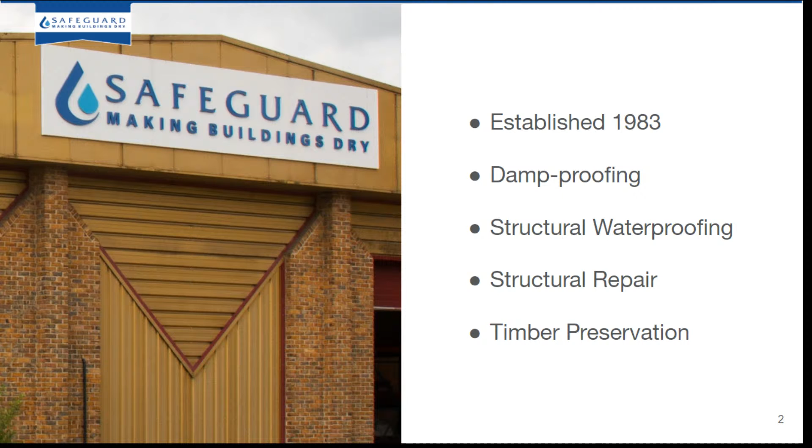A quick bit about us as a company. Safeguard has a long established history of manufacturing damp proofing and timber preservation materials. We're also suppliers and distributors of structural waterproofing materials. We have a dedicated team of materials scientists or material chemists to help us ensure quality control is maintained, as well as the development of new products within our range.

In the rather enormous world of remedial treatments, we like to consider ourselves market leaders. In that work we have had a lot of research collaborations over the years, which have also provided us with third-party test data, helping us attain certifications such as British Board of Agrément certificates, or BBA certificates, in the UK and overseas equivalents where we distribute to over 18 different countries.

Safeguard's product range spans many aspects of dampness in buildings, including materials for structural waterproofing solutions as well.

So today's seminar, really what we'll be looking at is the main guidance documents which relate to structural waterproofing, to ensure that your basement is both effective and compliant to regulations, as well as the evolution of basement waterproofing systems over the years, learning from mistakes, and how we've perfected the system year on year.

We'll be looking at advice on waterproofing design solutions, and of course, of great importance to specifiers, managing design liability, which involves working with specialist waterproofing designers and contractors alike.

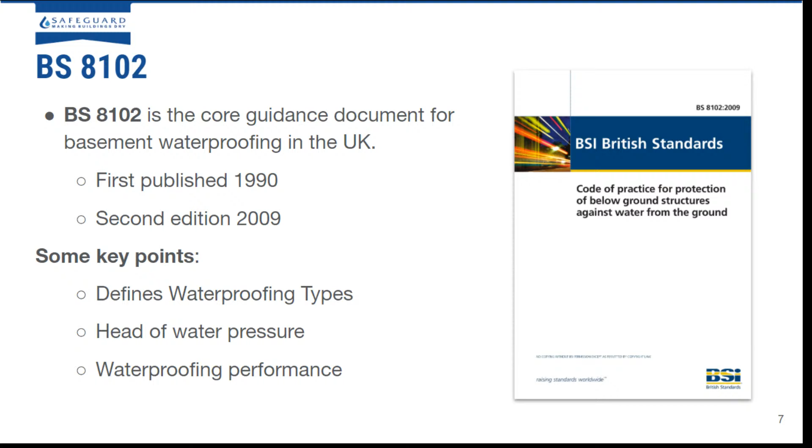So what is expected from basement waterproofing? Very simply, most people will want a dry basement, but how dry is dry, and how dry do basements literally need to be? For most of the time, the starting point for these discussions is: what is the area to be used for?

For example, if we look at this table here from BS 8102, we can say a basement car park situation would be environmental grade 1 in table 2 here. It describes some seepage and damp areas as tolerable depending on intended use, and local drainage may be necessary to deal with seepage.

So a certain amount of dampness would be expected. However, what we are probably most of the time looking forward towards designing would be a kind of a grade 3 environment. So that's where we go from grade 1, where some moisture is acceptable in terms of leakage. Grade 2, for example, plant rooms, workshops, where a drier environment than grade 1 is required. However, it's not habitable space.

That's where water penetration is not acceptable, but there may be some kind of dampness, some environmental humidity, which might need to be controlled as well, which is where we get to grade 3, where this is sort of the residential, habitable spaces, anywhere where you're going to be spending more time in there, either work or habitation. And this is where no water penetration is acceptable at all. And ventilation, dehumidification and air conditioning is necessary, appropriate to the intended use. And that is where the specification comes away from waterproofing into environmental control, appropriate to the intended use.

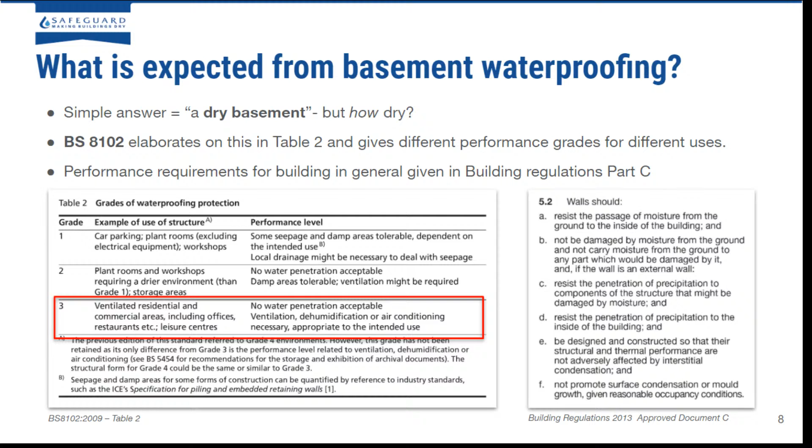So that really kind of gives us an idea about performance. In addition to that, on the right here we have a sample from Building Regs 2013 Part C, which refers to the impact of moisture on structure, its effect on ground slabs and retaining walls, etc., and how the building should be protected from the effects of moisture as well.

The UK approach to basement waterproofing seems to be very much about keeping as much water out of the basement as possible, and redirecting any water that manages to seep in towards a sump and pump.

So over the years, since the mid-90s, systems have changed quite considerably over that time, and a lot of mistakes have been learned, and it's very much more now a belt and braces approach, and does involve some advice learned off the back of a case called Outwing versus Randell, which back in '99 helped highlight the importance of having two systems as much as possible to prevent the impact of water entering a structure unwanted.

So in contrast, many other countries will have a much more robust approach in terms of the design of the building itself physically preventing all water from entering the structure, and usually avoiding the need for any kind of mechanical pump. But we are where we are in the UK with our market of both refurbishment and new build construction in differing materials. So we'll take a look at the evolution of waterproofing in a bit more detail later in the presentation.

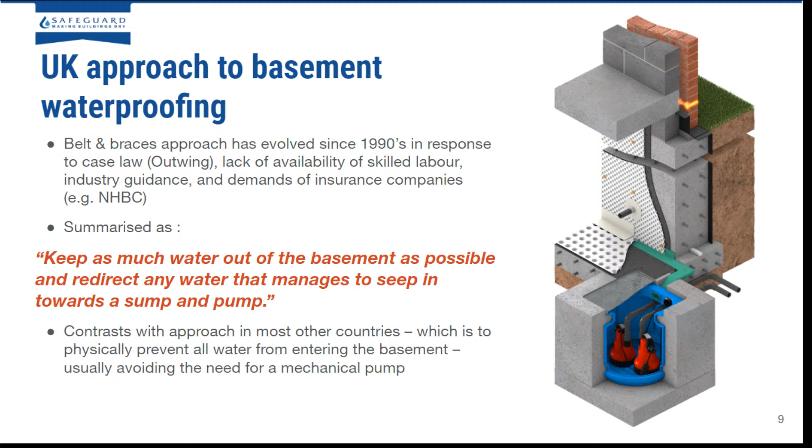So that's BS 8102 again, and it mentions the water head, so the height of the water likely to bear against the structure. Now this can be determined in a number of ways, in terms of costly site investigations, hydrogeological reports to establish where the water table may or may not be, how likely it is to be variable, whether it's a low or high risk situation.

Very often this kind of advice can be superseded, as it is in NHBC chapter 5.4, which we'll look at in a bit more detail later on as well, which is to generally assume the full height of water during the design life of the building, which is to say generally err on the side of caution and just design into a worst case scenario.

So rather than trying to mitigate how high you might take the level of your waterproofing on a structure, making sure that you design your waterproofing of the substructure and link it to the superstructure damp proofing course. Then that way you're fully enveloping the structure and protecting it against any kind of water from the ground.

Okay, so a little bit about waterproofing types as defined in BS 8102, which there are kind of three types, A, B and C. A being barrier protection, which can be applied to the inside, the negative pressure side if you like, or the outside, which is the positive pressure side of the structure, or even sandwiched in between.

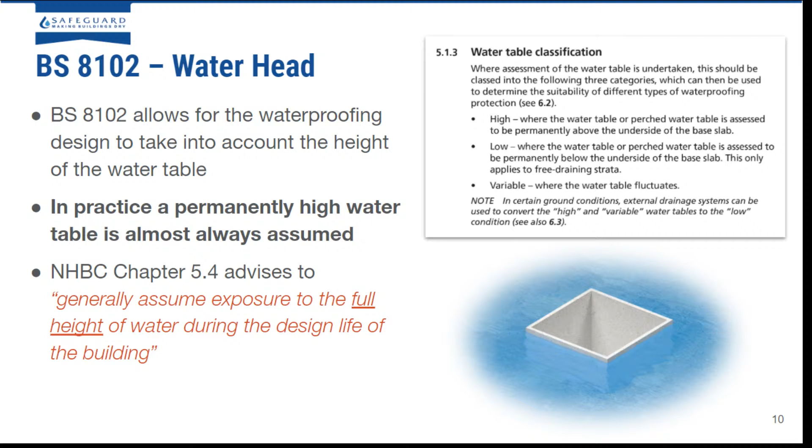Sorry, I've got ahead of myself slightly there. So that's kind of the type A barrier protection. Type B is your structural waterproofing systems, which is basically structural integral protection. So this is waterproof concrete designed to be waterproof, so actually the structure itself is doing the work.

With type C systems, these are what we call cavity drain systems generically, and this is much more about water management, where you're accepting that a certain amount of water will enter the structure, but you're managing when it does come in and redirecting it towards a sump chamber and a pump where it can be redirected further out to groundwater drain systems. So those are the three main types of systems that we have there.

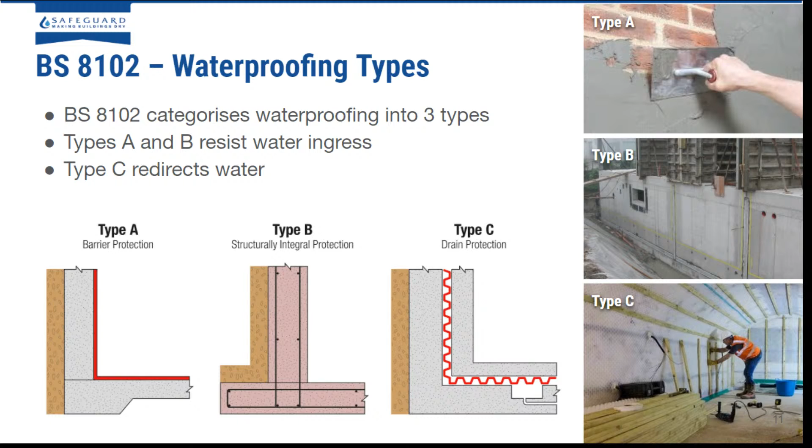So with type A systems, what we have again is a barrier protection system, and where there is a new build property, for example a new build construction, there is an opportunity to put it on the outside of the structure in a positive pressure system. Internally, as it may often be used in refurbishment of basements, or situations where the structure is built, for example with piled walls, you may need to waterproof on the inside. Then obviously these type of systems can be used.

And in the middle here is what's called a sandwich waterproofing system. It should be noted that this system in the middle is probably to be advised against. It doesn't lend itself for much in the way of repairs to that system, unless of course you add in an additional layer of a secondary system.

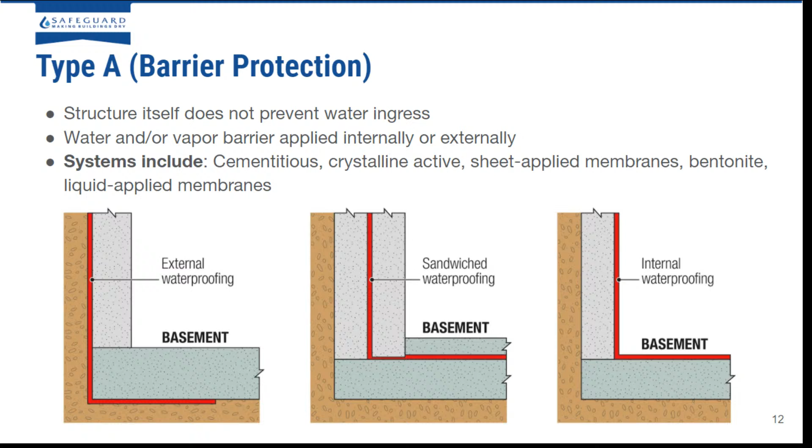So really anything which you can put on the positive pressure side, the benefit being that you can benefit from the pressure of the water pushing against the structure and keeping the system in place. On the internal waterproofing side, on the right hand side here, then obviously that may be a case where you have to install it out of necessity, but it can be mitigated with a secondary system as well.

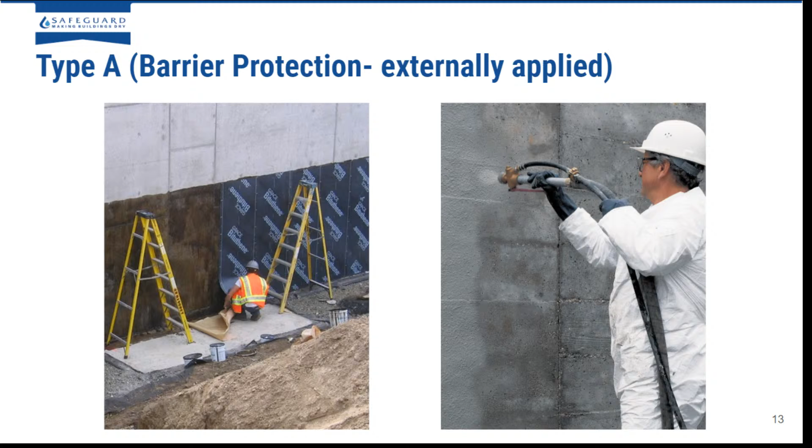Okay, so a few examples of type A barrier systems. Cementitious slurries can be sprayed or brushed or even trowelled occasionally. Bonded sheet membranes. We have liquid apply systems which can be sprayed as well, PU systems and such, polyurea. We also have the crystalline active slurries which can be sprayed onto concrete as well.

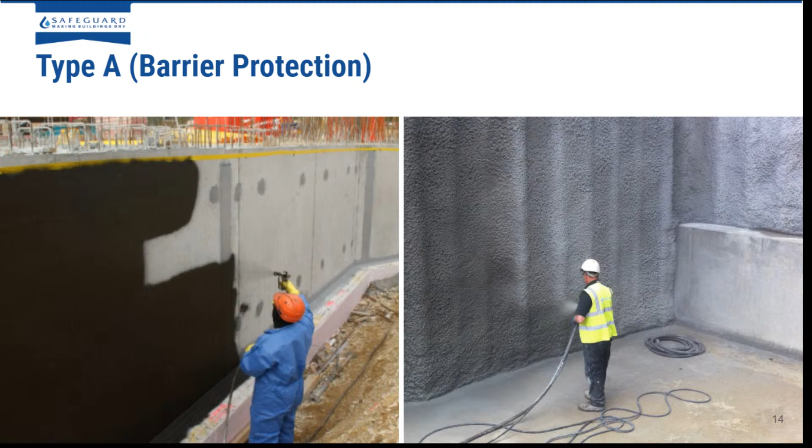Crystalline active slurries are slightly different from the standard cementitious slurry which you might see as a traditional tanking, and they work in a slightly different way.

So just to run through this chart here, where we obviously have the structure formed from new concrete, crystalline actives can be applied internally or externally. The new concrete will contain a certain amount of free lime within the structure, and what happens is that these crystalline active slurries will react with the free lime within that structure and actually cause the growth of crystalline complexes which grow back into the capillary pores indicated in red.

Just if I put the pointer on here, just over here - so this is where the crystalline complexes are growing back into the structure, and they will help to prohibit the moisture from penetrating through the structure any further.

Often combined with type C systems, the cavity drainage systems, as they also offer some protection against free lime by restricting the growth of free lime by actually inverting it back into the concrete. So a very good system to use.

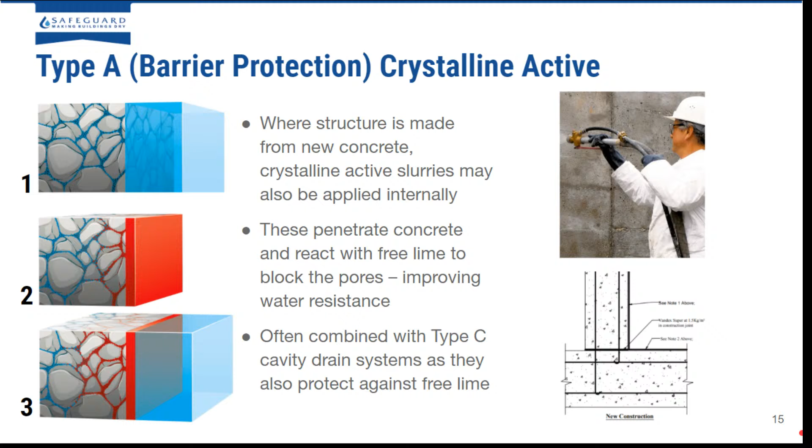Often benefits of this include things like coverage rates, because it is not applied as a thickness of layer - it is literally like a cementitious paint almost when it's applied. It can also be dry sprinkled onto wet concrete or damp concrete, green concrete, and be used, for example, on the top of a slab before the concrete wall is sat down and cast on top of it, and that will help to provide a construction joint protection layer between the two elements, the slab and the poured concrete wall. So quite a diverse product.

Where we are applying type A systems internally as a protection layer, we do need to be mindful of some conditions that must be met. And when you do apply these systems to the internal face of the basement wall, known as the negative side, there are additional demands placed on these type of systems. Any groundwater pressure can effectively push through and delaminate that tanking layer from the wall.

If you consider, for example, old Victorian brickwork as a good example, obviously there can be conditions there where we have weak mortar, weak bricks. Water pressure that is strong enough can easily push through that element of the structure and create a water pressure behind the applied layer. So these systems must be capable of being applied to a damp substrate, which sounds pretty obvious. Most cementitious systems will easily do that.

Must be able to withstand water pressure on the negative side, so that is slightly a gamble in refurbishment situations, less so in more designed and constructed basements. Water pressure must be resisted by the bond between the tanking system itself and the substrate, which needs to be suitably prepared so it can accept the tanking system without loose material or friable surfaces being pushed off by acting water pressure against the structure.

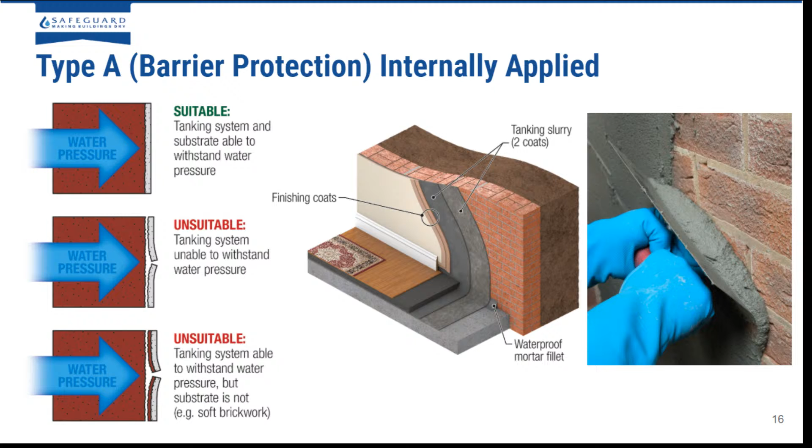If you have any doubt about the suitability of a product, ask the manufacturer for evidence of its effectiveness, or advice on another way around the design. If you go for any type A system on the internal, negative pressure side, correct surface preparation is essential, and the application must be carried out meticulously to ensure a good strong bond against any water pressure coming to bear.

With type B systems, structural integral protection, effectively the structure is the waterproofing system. This can be a combination of waterproof concrete designed to be waterproof, or waterproof additives included. Construction joints should be considered as potential weak spots for water to come in - even if the structure itself was formed from stainless steel, those construction joints are where the problems will occur.

Concrete should be designed to BS-EN 1992 Part 3. It will be waterproof, not vapour-proof, so an external or internal vapour-proof membrane may be required. There would also be some consideration around the cost of additional steel reinforcement to form a structure able to withstand pressure, and with those day joints and construction joints, it is worth considering further.

For example, in the most basic design, we might form a raft slab and build a wall straight off of it. It might be worth considering putting in an additional kicker, as shown at the top of this image, which takes the level of the construction joint slightly higher above the point at which water is likely to collect on the extended toe of that slab and creep through. This takes it to a slightly higher point, so it's less likely to build up and creep through that construction point, particularly when an additional water bar, water stop or hydrophilic strip has been applied in that structure as well. Dealing with those construction points is absolutely key, even with waterproof concrete systems.

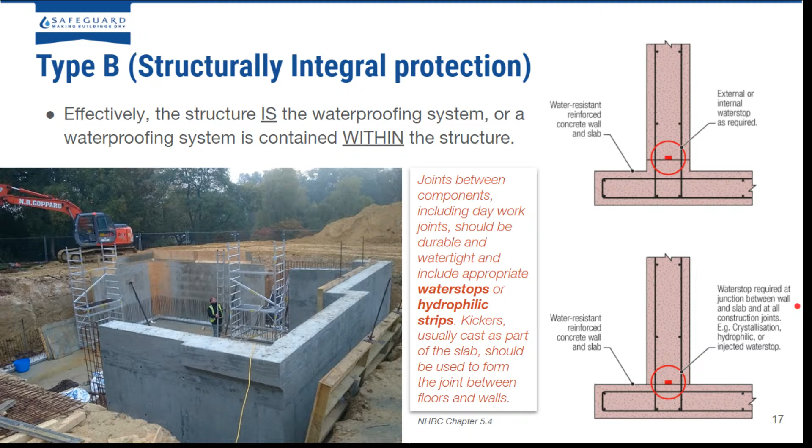When it comes to waterproof concrete, there are two main forms really. There's waterproof concrete with admixtures, where there's an expectation that crack width should be limited to 0.3 for flexural cracks and 0.2 for cracks that pass through the section. There are companies out there that will monitor the mix, the additives going in, the supervision of the mix and the pour of the concrete on site, and sign off on those applications as part of a guarantee system.

We are looking to apply concrete which is designed without admixtures, relying on the strength of the concrete itself. Then there are other expectations - you should expect some post-construction crack inspection, and it may be that you need to resin inject afterwards to deal with any shrinkage or thermal cracking that might have happened. There may be some post-installation work that needs to be carried out, and a minimum section thickness of 250 mil should be used in this kind of design. Again, refer to BS-EN 1992 Part 3, Code of Practice for Design of Structures for Retaining Aqueous Liquids, for further advice on that.

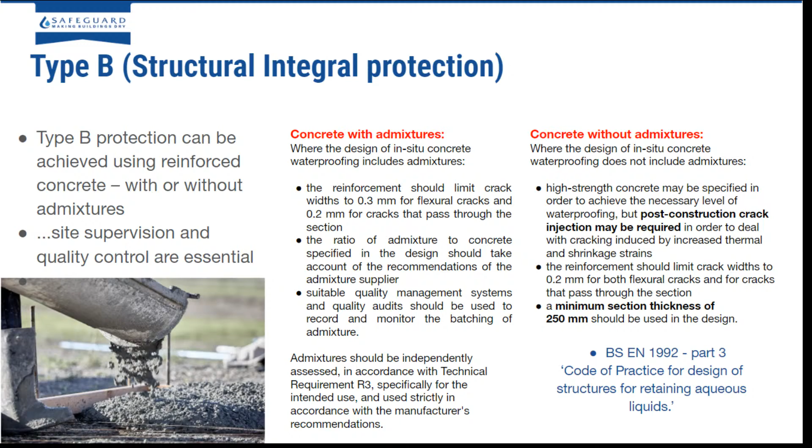Okay, cavity drainage systems, drainage protection, Type C, however you want to call it - egg box, bubble wrap, all sorts of nicknames this stuff has.

Often applied internally. Geotextile based or backed versions can be used externally as well to offer additional drainage layers on the outside of a structure.

Cuspated or dimpled plastic membranes are now a very familiar concept in the UK, particularly in basement refurbishment projects. They are preferred by specialist contractors mainly because they eliminate issues with bonding, delamination, and adhesing. They're much easier for surface preparation, much simpler to apply, with less disruptive prep work.

They are an alternative to type A and type B systems, whereby they actually control any water which it's anticipated will come in, and they then control the flow of water to a point at which it is directed into a sunken sump chamber with a pump, which will then take it out to surface water discharge.

So there is some requirement for the structure itself to have some primary resistance as well. It's worth inspecting the substrate to make sure there's no free water literally running in. Once some localized repairs have been applied, you can then apply these membranes and create a fully draining system much easier without too much risk.

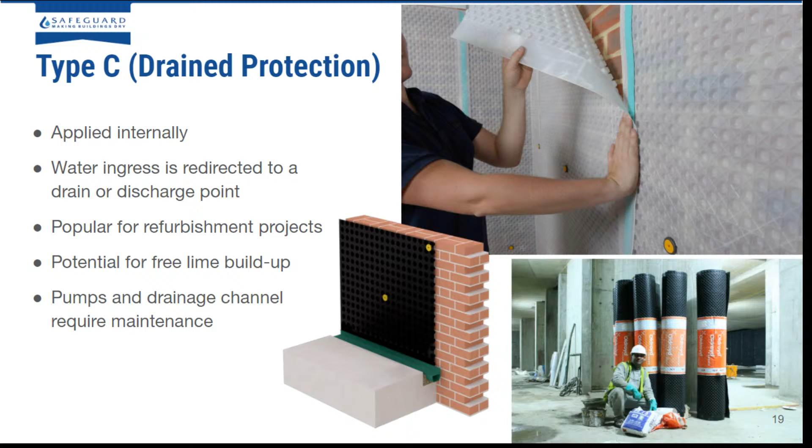So to reiterate, as stated in BS8102 and also further mentioned in the Basement Information Centre Design Guide: the external basement wall must provide enough resistance to water ingress to ensure the cavity accepts only a controlled amount of water or dampness. That's probably the short version of it.

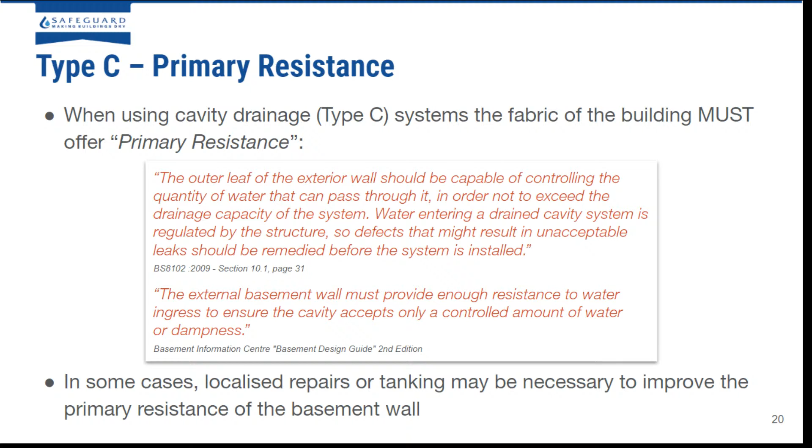So some localised repairs may be needed to allow the system to manage the amount of water coming in, rather than just constantly running where free water is running into the structure.

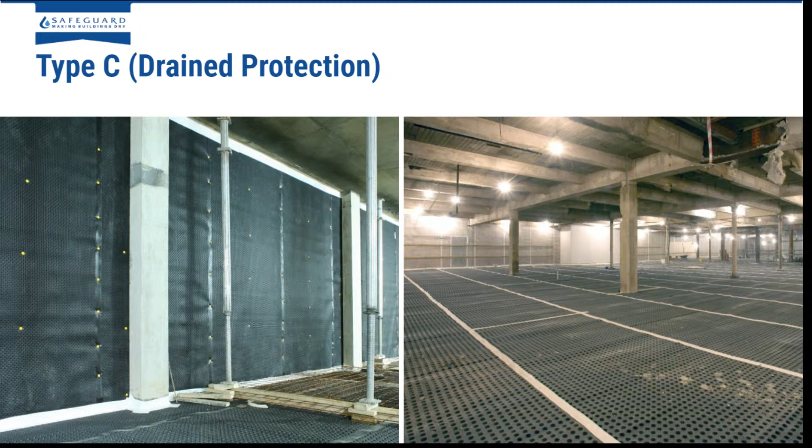And again, Chelsea Academy, similar construction. This is obviously a new build structure, as you can see by the condition of the concrete here. This is installed as a secondary system, obviously in a high prestigious place - it's also a sports hall. No option there for any risk of water to come in, and if it did, it could be easily managed by having a cavity drain system installed.

Cavity drain systems are enabled, should we say, by the inclusion of perimeter drainage. This is a proprietary channel installed at the wall floor junction, preferably. There are different ways it can be set up, preferably in the recess of a slab, so the lowest point takes it to the next lowest point, i.e. the sump chamber, where it will be pumped out.

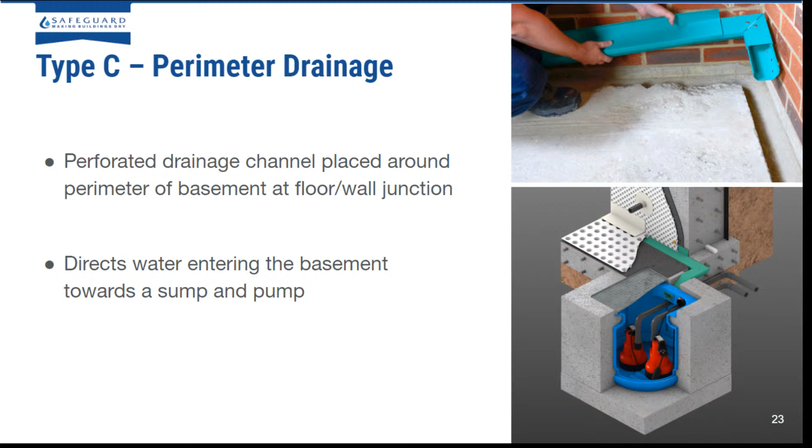These would be installed, and additionally you want to make sure there are access points installed around the perimeter of your structure, so that the channel can be flushed through, or rodded through if need be, so that any loose debris, free lime, silt, or rubbish can be flushed through into the sump chamber and removed. That way whatever's happening on top of that slab, the channel is being fully maintained, and water which does get under that system will always be able to move freely.

NHBC chapter 5.4 has the following requirements for pump systems: there should be a primary pump system, mains operated, a secondary pump system which can be operated by battery or generator backup, an audio visual alarm that indicates failure should that happen, and the pump should operate automatically.

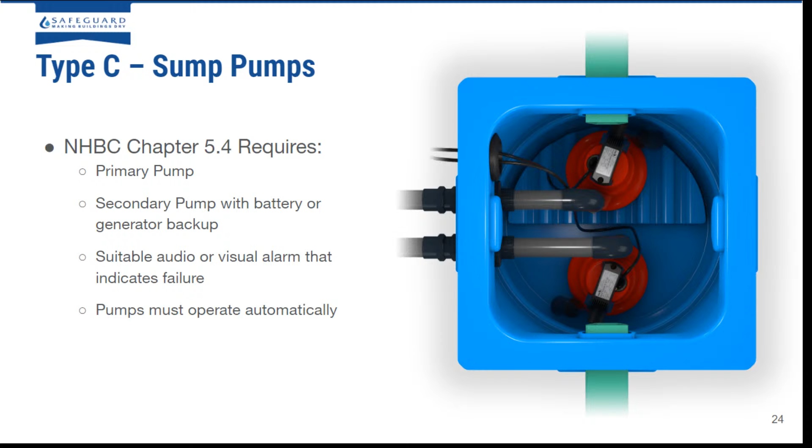Most of these pump systems you see in the market will have a float arm, which will kick into action once the level of the arm has reached a certain point. It will activate the pump and pop it into action. Additionally, once those pumps have been overwhelmed, should that happen, there are secondary miniature float switches which will then activate alarms to indicate that there is a failure in the system.

In simple terms, there are telemetric systems which will contact you by mobile, all sorts of systems out there as well. Our friends at the PCA, the Property Care Association, have a best practice guidance document for groundwater pumping stations for Type C systems, because very often we get asked how many pumps do we need, what size chamber, etc.

The best practice guide as a kind of coverall, if you put a gun to somebody's head, they would probably say one sump per 50 linear meters of channel. That's one sump chamber, which would have 2 pumps in it - a mains operated and a battery backup system, linked up to an alarm as well. That would be a good sound solution, so 50 meters of perimeter per sump chamber as an approximate guide.

Obviously, what you can't account for is changes of conditions to structures in and around the basement that you're waterproofing, weather conditions, groundwater conditions. All sorts of things can change over the years and the life of the structure, so it's best to opt for that worst case scenario and put in a system that's going to deal with as much as you can expect.

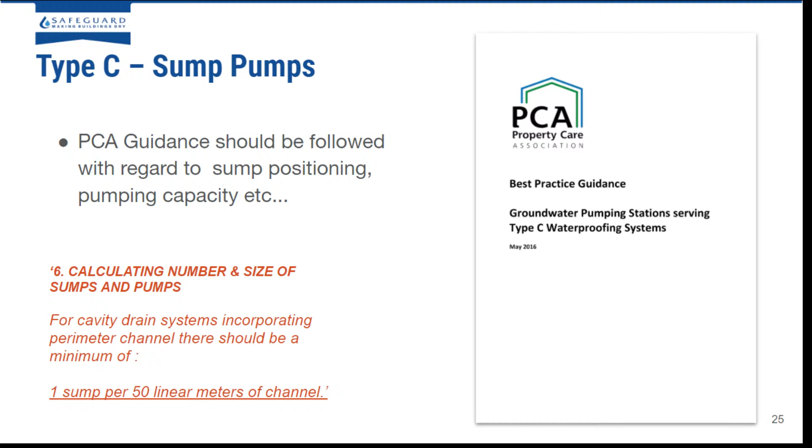One thing to watch out for, we mentioned free lime previously, is the build-up of free lime, and this is why it's important to operate maintenance schedules for pump systems, and to also install access points within the perimeter channel to make sure they can be properly maintained.

The risk of free lime, as you can see in these photos, can be quite damaging, and once that pump's failed, the water that's collecting there is not going anywhere. Before you know it, you're ankle deep in water.

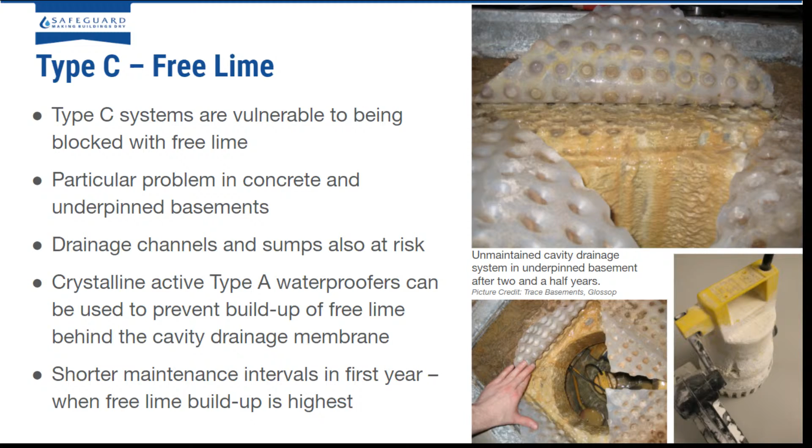There are ways of managing the onset of free lime in terms of lime inhibitors on concrete prior to application, but also acids, for example, which will break down lime if used carefully, once it has become present. Normally you would expect to have a pump maintenance schedule for your basement waterproofing system to manage the effects of free lime.

This is how it sometimes looks more innocuously here - he says, looking at a photo of a rather damaged pump at the bottom right there.

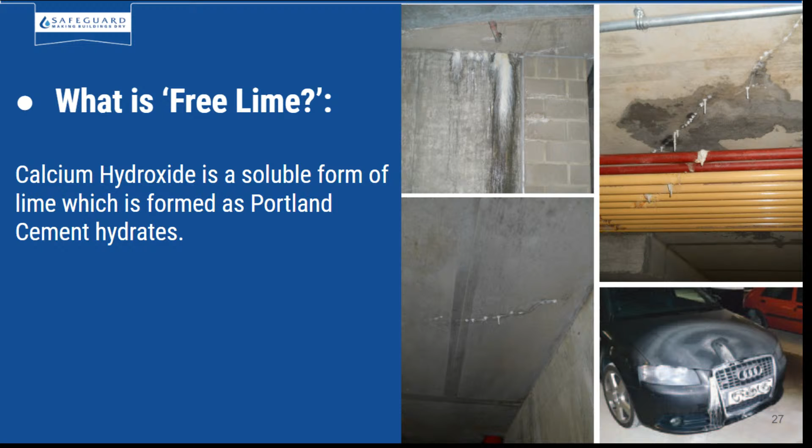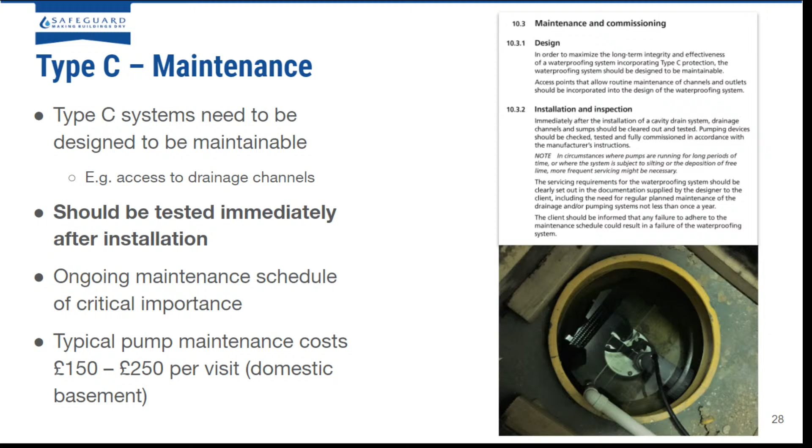So really what we're looking at when you install these Type C systems is that as part of any design system, you should include a pump maintenance program, which may be every 3, 6, and then annual inspections after the first year, where most of the free lime would have washed through by then. Most specialist contractors that install these systems would suggest that if you do not comply by having a pump maintenance schedule and annual inspections, you would forfeit the terms of your guarantee as well.

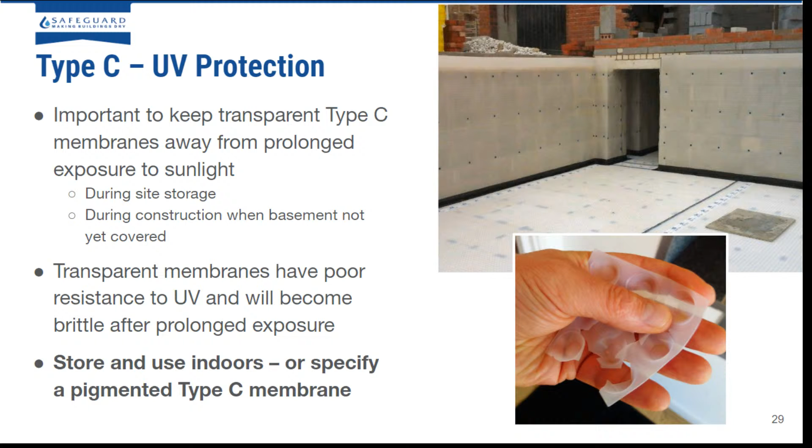A very quick side note on the importance of UV protection. It has been noted over the years, as part of the ongoing evolution of these systems, that clear, non-pigmented membranes tend to have a poor reaction to prolonged exposure to sunlight. UV light can tend to make them brittle. It's something to be aware of, but not to panic about - certainly worth considering where materials might be stored on site for a long time. If that happens, just make sure they're covered up so they don't succumb to this phenomenon.

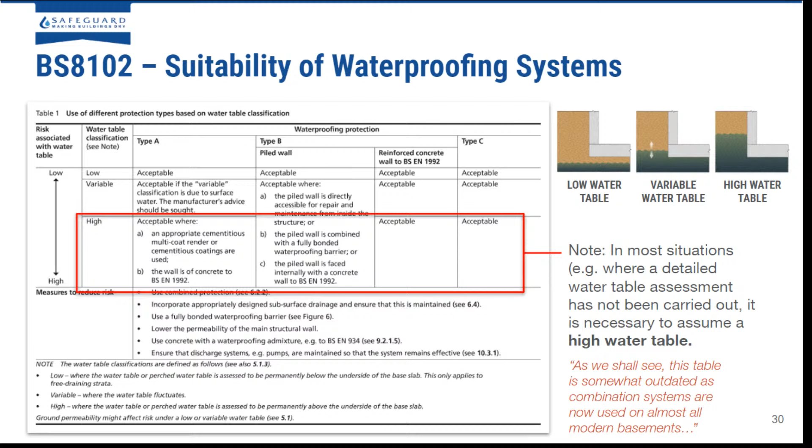When it comes to suitability of waterproofing systems and combinations of systems, we have this rather complicated chart available in BS 8102 in the current incarnation - hopefully this might change in the new one. What we see in red there is about measuring the risk of high to low water table, in terms of classifications. In red at the bottom, I think, bypasses all of this - this table is somewhat outdated as combination systems are now used in almost all modern basements. Particularly with what we call grade 3 systems, where this is habitable space, you would pretty much always use a combination system in basement waterproofing design.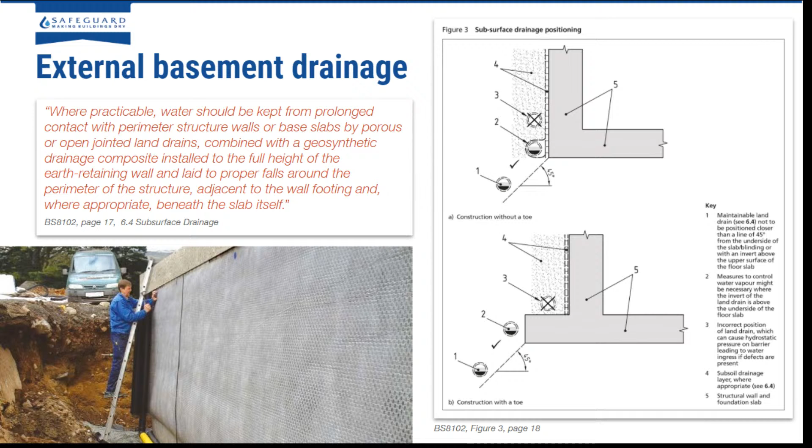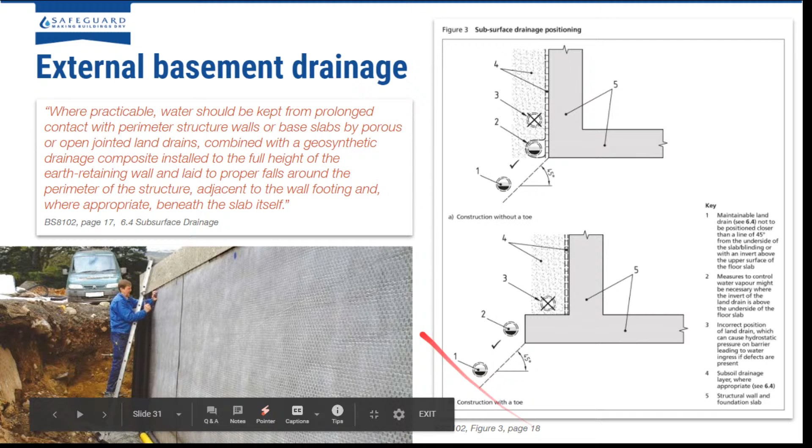As an indication, we quite often see this happen where the land drain is sat atop the toe here. Best advice would be to move it down at a 45-degree angle, away from in line or below the level of the slab. If it's sat here, it will collect water against this potential construction joint between the slab and the retaining wall, and that's where you're asking for water to collect and track through, or put it under more pressure than it should bear. So bringing it away from the wall in positions 1 or 2 is much more acceptable.

Construction joints and service entries. When we consider things like NHBC Chapter 5.4, we are looking at minimising and avoiding any kind of penetrations through the structure itself. So bear in mind when designing a structure, where services do need to come out, rather than taking it through a layer of waterproofing, try and design it up and over and out, so that we reduce the point at which services need to penetrate any waterproofing system, which will help reduce the risk of subsequent failure.

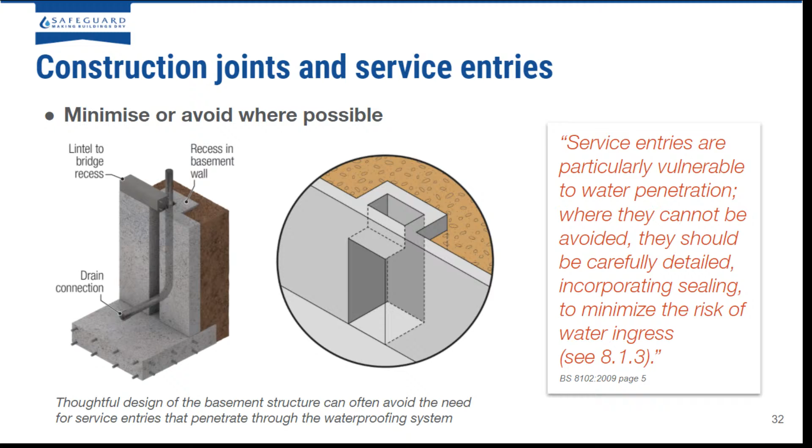However, sometimes you can't avoid it. Certain construction joints between wall and slab, for example, are unavoidable. There are a number of ways, from hydrophilic strips and water bars to elasticized adhesives and construction joint tapes, which are bedded in with polymer modified slurries, bedded in with construction joint tapes against those structure points, on the positive pressure side, to stop water from penetrating through.

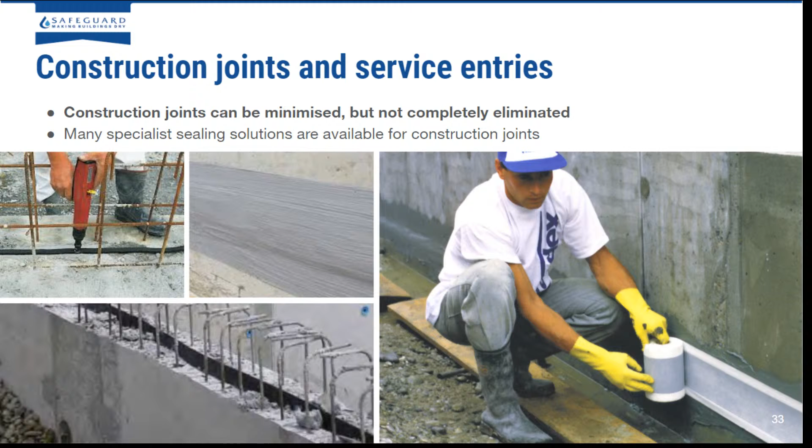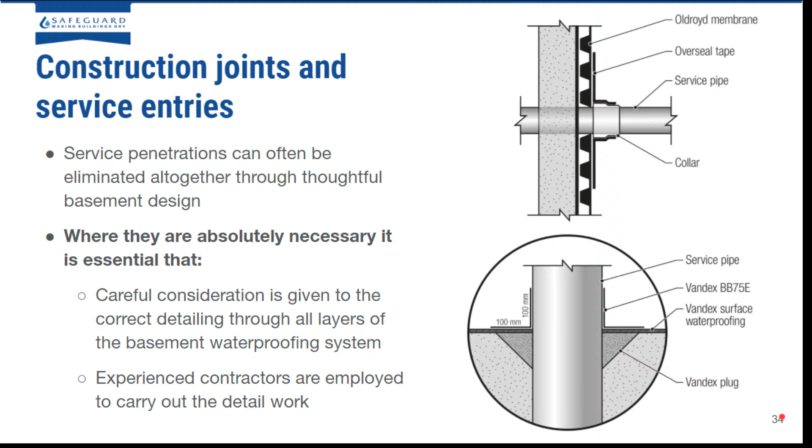However, occasionally you might run into a situation where you do have to go through. It could be a basement refurbishment, or an existing service which is immovable, and you have to detail around that. This is where, as much as we can show all sorts of details, it is important to be using experienced contractors who will use their wherewithal and the right products to deal with these kinds of situations.

We are also required to mention fire safety in basements, or at least nod to it and give you directions to go to. So approved documents B, volume 1 for dwellings and volume 2 for buildings other than dwellings. These documents lay out conditions regarding, for example, emergency escape windows, protected stairwells leading from the basement to a final exit. There's a lot of conditions on the types of fire doors required, and the consistency of access and egress in the area below ground in a fire situation.

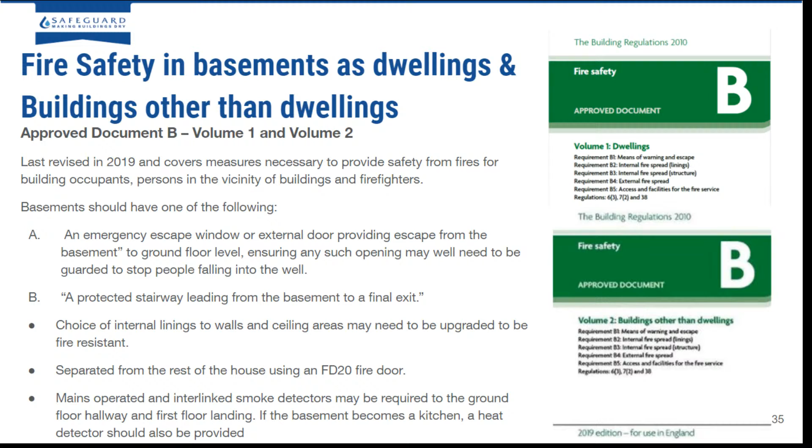Additionally, we are required to mention the effects of materials in fire situations. Back in January 2020, for example, we have this document, a review on the ban of use of combustible materials in and on the external walls of buildings, including attachments. This is obviously as a result of the Grenfell incident. Although it's not specific to basements, it gives us a nod toward considering any materials likely to be flammable in building makeup, which may give us a clue to how the future is going to go in terms of waterproofing. So we have to consider things like plastic membranes, polypropylene membranes, HDPE membranes.

When burned, they do release things such as hydrocarbons, carbon monoxide, carbon dioxide, and aldehydes, so there are effects when these materials burn. With cementitious materials and the right substrates, there's a clear benefit, as cementitious tanking might typically be rated as a Class A1 product in reaction to fire. So there's a clear benefit in fire resistance over cavity drainage systems, but it's about balancing current obligations against what they might be down the line.

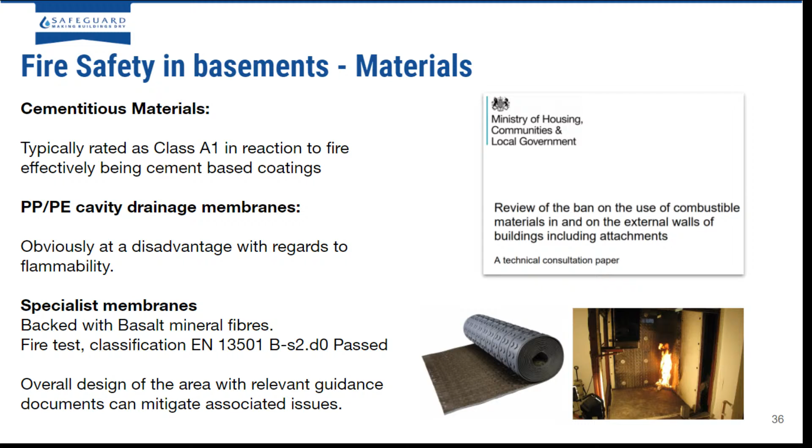There are specialist membranes on the market. Our supplier has specialist membranes with a basalt fibre backing, used in tunnels where it has great fire resistance. This can be cost prohibitive at the moment, but down the line we might see these fire resistant membranes becoming more of a norm. So it's just a nod to the future really.

Okay, so improvements in basements and waterproofing standards from the 90s to present day. Where do we see basements fail? We've seen lots of issues with construction joints, and cases where singly applied systems failed and allowed water in. This resulted in new case law which set a precedent for applying combination systems, usually a primary followed by a secondary drainage system.

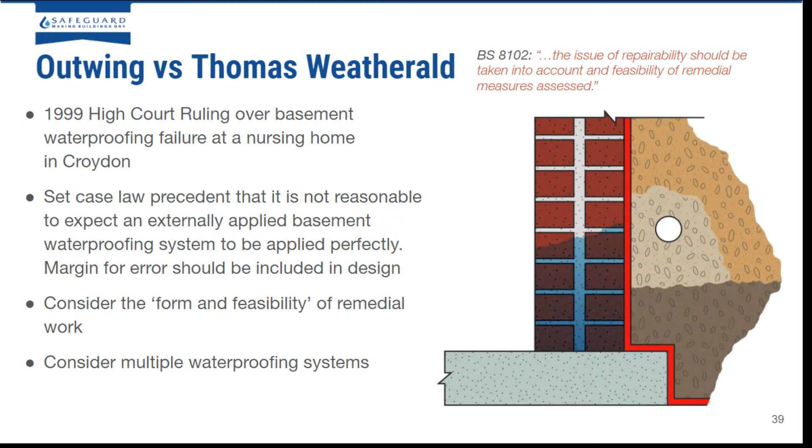The case went to court, and a ruling was found that it's not reasonable to expect an externally applied waterproofing system to be applied perfectly, and a margin for error should be included as part of the design. So the form and feasibility of remedial work should be considered, and multiple waterproofing systems, again depending on grade 1, 2 or 3, should be considered to provide a good waterproofing system which fulfills the terms of the contract, i.e. a waterproof basement.

With BS 8102, the lessons from Outwing were reflected in the 2009 edition. Where defects may occur, systems should be repairable, and combination systems should be considered if you want to further your offer of protection on a substrate.

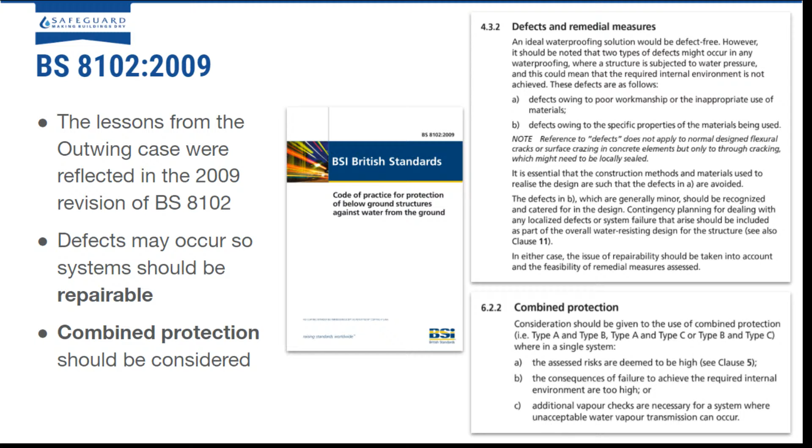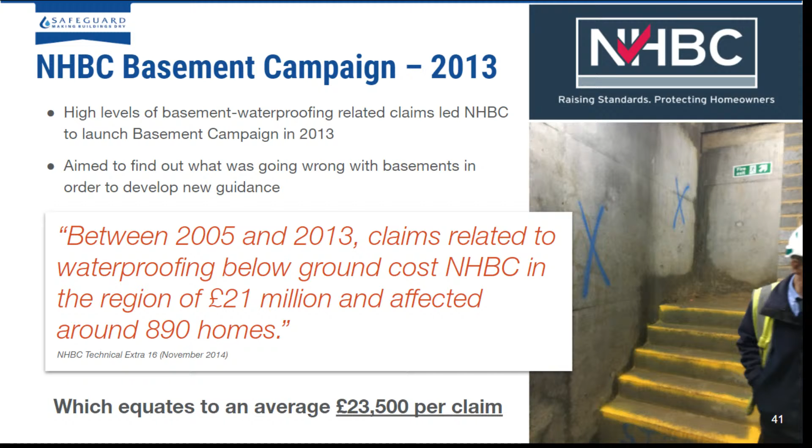NHBC, National House Building Council, started a campaign in 2013 after running a review between 2005 to 2013. Claims relating to waterproofing of below ground structures cost NHBC in the region of £21 million and affected 890 homes, about 23.5 grand per house over that period. This gave them cause to review the claims made and take a much more analytical approach to structural waterproofing in terms of future warranties and guarantees. They stipulated a few weak spots in design where things were going wrong, and wanted to alleviate those problems, reducing payouts but also ensuring inconvenience to homeowners wasn't an issue anymore.

Some of the issues were jointing defects at ground level, where substructure meets superstructure, not just at the wall floor junction, but at the top where the basement stops and the ground walls start to build up on top of it. Service penetrations and podium slabs accounted for about 12% of claims. A single system being used alone, either Type A or Type B waterproof concrete, without any secondary system in projects with a high or unknown water table. And often, as sad as it is, poor design and workmanship.

That was about it. It wasn't thought of properly and it wasn't installed very well. And I think that's where a lot of the issues occurred as well.

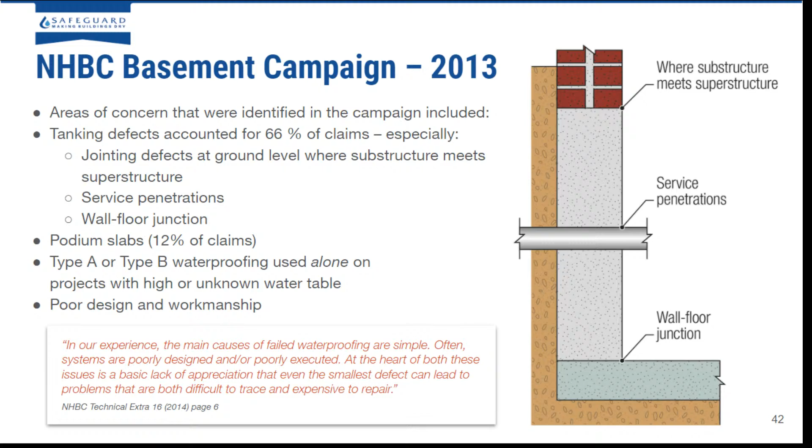So NHBC took the findings from the basement study and codified them into new guidance. Once these were released, it's built on top of the advice given in BS 8102. Again, not mandatory, but still very good advice. If you combine this with BS 8102 and look at the advice given in those two documents, then you're going to have a very successful design and basement construction.

And it has proven also to be a success, and as of 2019, NHBC had not had any basement waterproofing claims since the Chapter 5.4 was introduced back in 2015, so a worthy document indeed.

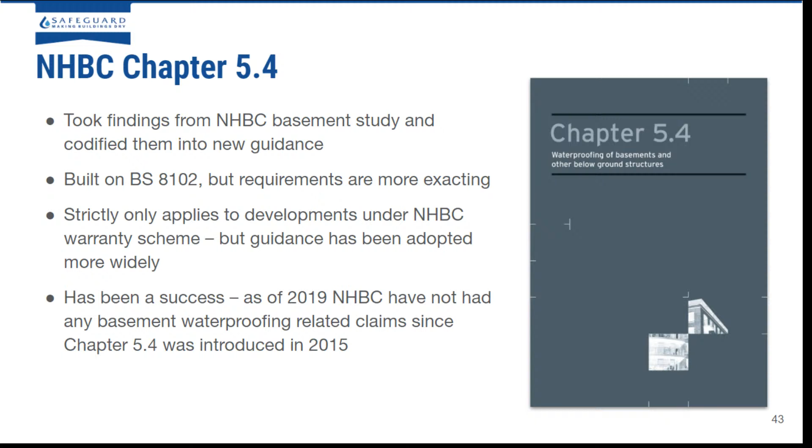Okay, so some of the things that the document lays out include a qualified CSSW system designer, certified surveyor for structural waterproofing, combined systems to make sure that you are accounting for any potential damage or failure in the original waterproof system. Assume a full height of the basement for waterhead.

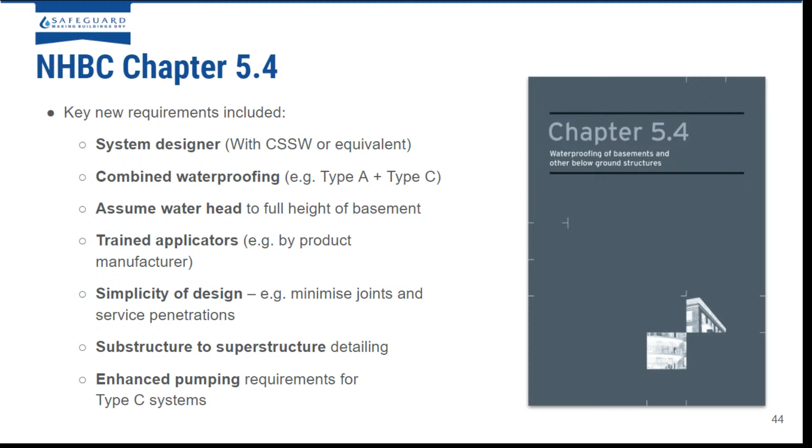Trained applicators - people who are installers trained to use this product correctly. Simplicity of design - make sure the structure itself doesn't offer too many complications that allow water in at early stages. Make sure the substructure and superstructure detailing is linked. Making sure you have an appropriate pumping system, a pumping station, for your Type C system as well.

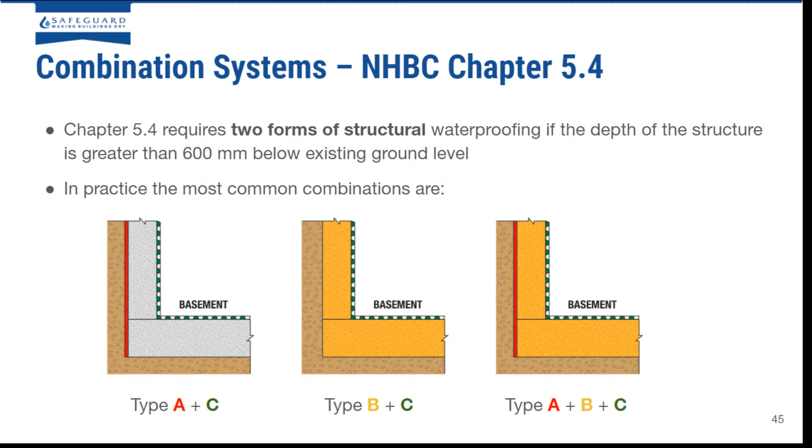So this is what we're looking at: Type A's, B's and C's. Effectively, barrier systems and waterproof concrete systems, but all supported by the inclusion of a cavity drainage system to collect any water which might come through construction joints and the such.

So modern basement systems - this is where we're going to, just a reminder of what we mentioned before, with the general premise being to keep as much water out of the basement as possible and redirect any water towards a sump and pump to remove the water.

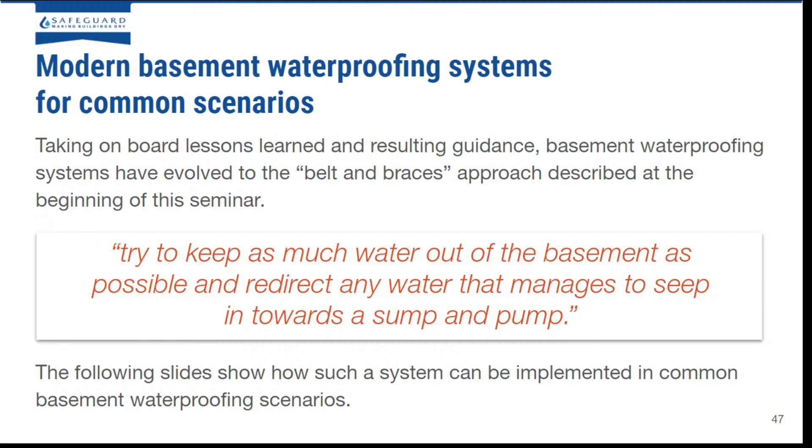And this is kind of what we're looking at. These are systems that we've come across, subject to basement types and common scenarios.

So new build reinforced concrete, where we have an opportunity to use things like crystalline active slurries between construction joints on the external face of the structure as well, possibly waterproof concrete indeed, a water bar between the construction joints to enhance the waterproofing, even a strip on the outside - a construction joint tape on the outside - to additionally enhance that, a drainage layer on the outside as well.

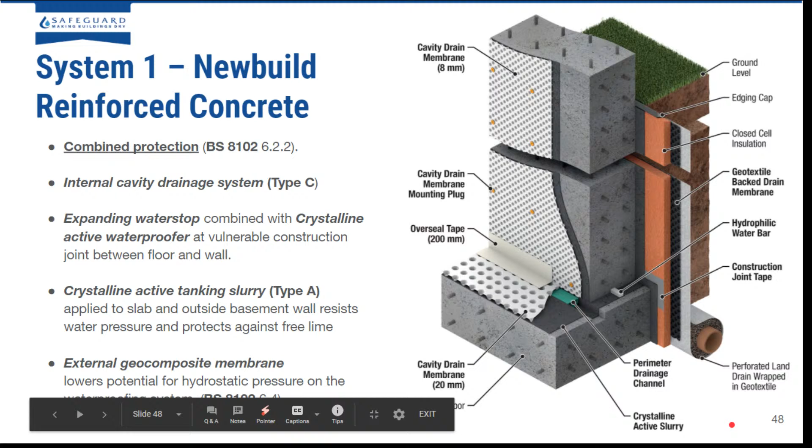And this is all bells and whistles, and even a drainage layer on the inside, which will collect any water which - God knows how it would get through that lot - but if it did, it would initially be collected and taken to a sump and pump system. So a complete and utter bells and whistles approach for high risk situations, but some of those parts might be interchangeable.

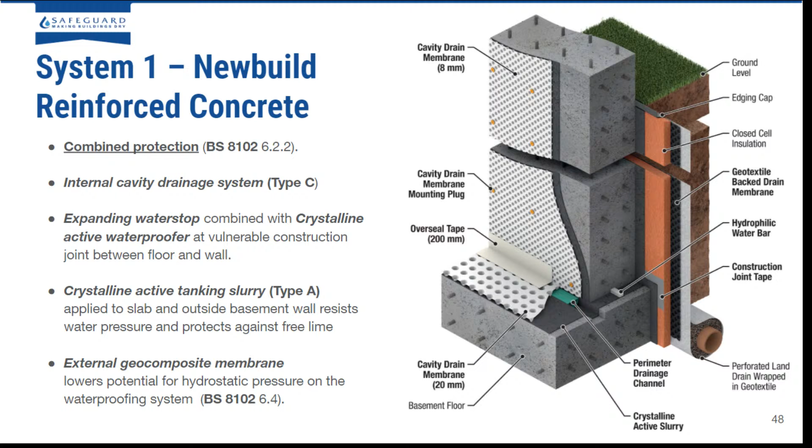Okay, system 2 is your dig out or underpinning of an existing dwelling. So this is where we occasionally see these systems, where a basement is effectively being lowered to become deeper than it originally was.

So in these situations, we have things considered such as dry pack, a loose material between the concrete and the original, existing brick structure. So we've got a different amount of materials. So this joint here is something to be careful of.

So we can provide some Type A systems on the structure to offer some solution, but it's going to be limited in success because of the different materials.

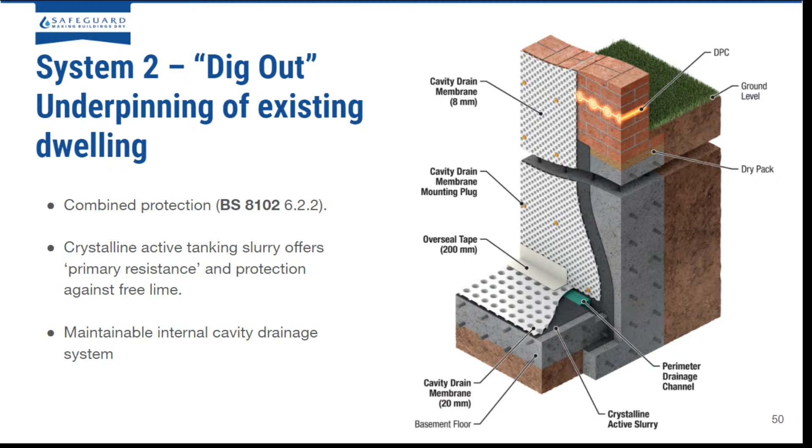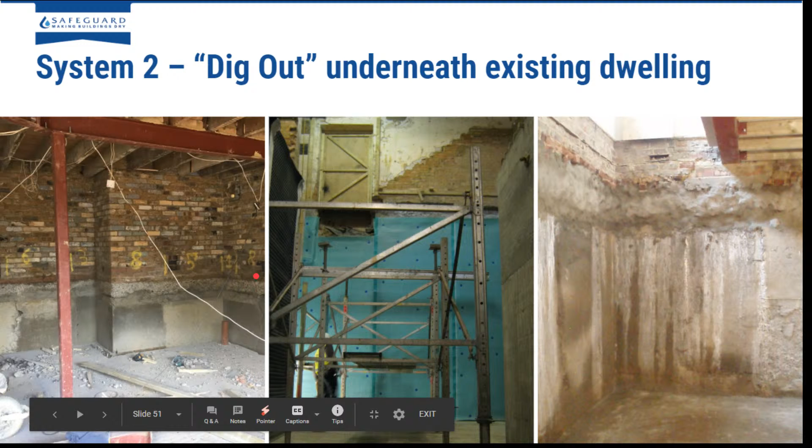So the cavity drain system is your capturing system, if you like. So anything that does get through those risky points will be collected and managed by the cavity drainage system. Just an example is underpinning, where you can see dry pack and loose material in between the concrete and the original structure.

Okay, piled retaining walls - we see this a lot in urban areas where we are building in between existing buildings. So we don't have a big hole in the ground in the middle of a field that we can excavate and then build from the bottom upwards. This is very much about top-down construction. So the piles are drilled down and filled with concrete to form our retaining walls.

As we excavate down to the level where the slab is installed, perpendicular to the piled walls, we can reinforce the concrete piles with either cast concrete, formed concrete, or sprayed concrete against these walls. So here is the joint that we need to manage.

Again, we can add a Type A system as our primary system to the wall and the slab, and the junction between the two. But we do need to be mindful of the fact that there's still a risk for water to come in.

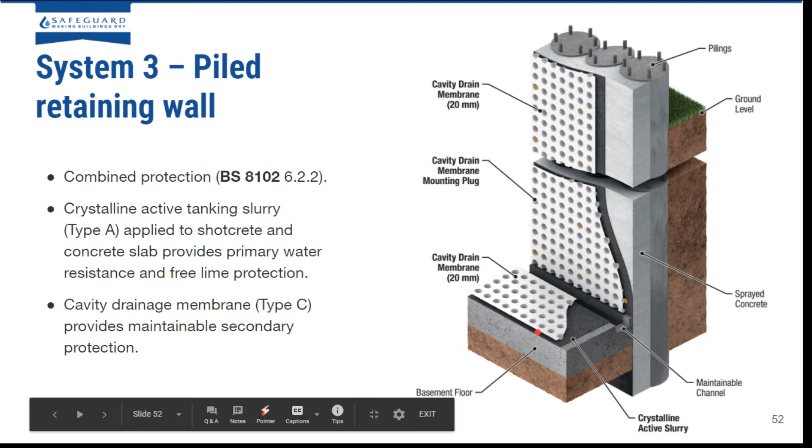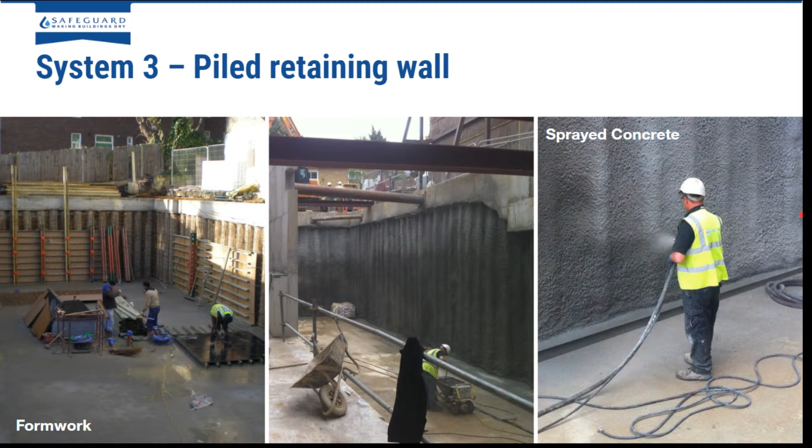And finally, system 4, which is the refurbishment of an existing basement. This combination system isn't always possible in these kinds of applications, although you might be able to provide a Type A system of crystalline onto a new concrete slab, for example, if the basement floor is

effectively just a bit of screed on dirt, or sometimes not even that, just bricks on dirt. With a new slab, you have the option to provide an additional waterproofing layer and lime control agent on top of that slab before installing your cavity drain system,

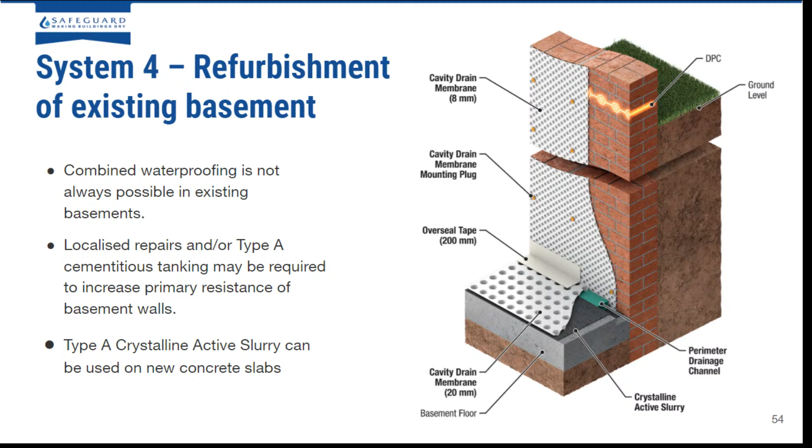which would be by far and away the best system to use in a situation where you have existing masonry and mortar courses of unknown strength. There's a risk against that with putting in a Type A system, so this would give us a much more risk-free solution.

Just as an example, you could be spending forever and a day prepping these surfaces before you can even put a Type A system onto those substrates. With cavity drainage systems, the process is much cleaner and quicker, with less preparation required.

What I might say is that there's some loose material to be removed, absolutely. Location of services and water pipes should be considered, of course. Maybe some biocidal treatments to get rid of some of the effects of the dampness and the mould and the algae

that's growing around here. Maybe look at any embedded timbers which have to remain in situ, making sure that they are treated as well with a suitable biocide to prevent the effects of rot occurring behind the membrane. So do bear that in mind as an additional point.

So when it comes to basement waterproofing, those are the four main types of basement scenarios. When it comes to basement waterproof design processes, this is a little outline of taking the basement design process from the idea of a basement build, through construction process

and choices through the waterproofing systems which might be available, into effective design, installation, and finally an established maintenance program, which should also be part of a guarantee period as well.

So we can see how we go from the idea of wanting a basement, how we work it out, what sort of choices we make regarding the structure itself, and how to simplify the actual design itself. An architect, for example, or specifier might contact us to choose a system appropriate to that.

And this is where, as suppliers, we're obviously limited in our ability to provide assistance, but we do what we can to the extent of our remit.

As soon as possible, what we'd like to do is get you in contact with a waterproofing design specialist, such as a design consultant, should the job call for it, or a specialist waterproofing contractor.

Either of these can help. They can work in conjunction, or you could just go straight through to point 4 and go for a waterproofing contractor who will install and insure their own design as well as installation.

And finally, we get to the stage where the job is complete, and now we're looking at making sure the system has been installed properly, with all terms of the guarantee accounted for. Now we just need to worry about ongoing maintenance and any kind of handover to the owner of the property.

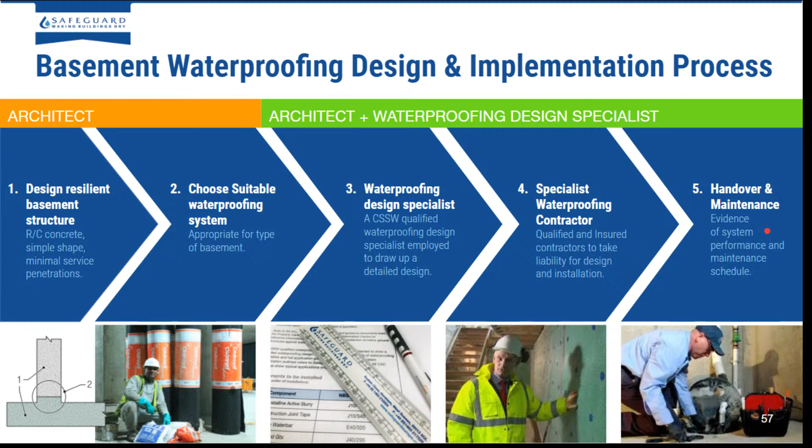Okay, so when it comes to things like designing, step 1, designing a resilient structure.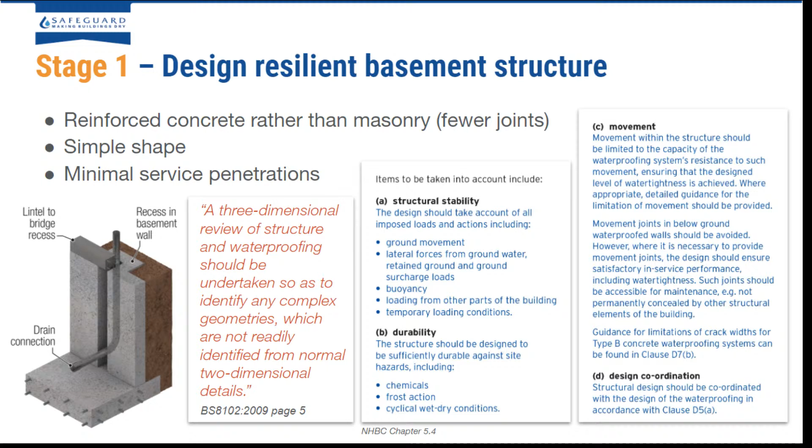A good three-dimensional review of the structure and waterproofing should be undertaken so as to identify any complex geometries which are not readily identified from normal two-dimensional details. This is something BS 8102 reiterates. It's about making sure there's buildability in your waterproofing system, ensuring it fits the structure without too many hiccups, keeping the structure stable and durable, anticipating movement where it might occur, and minimising service penetrations through the structure itself.

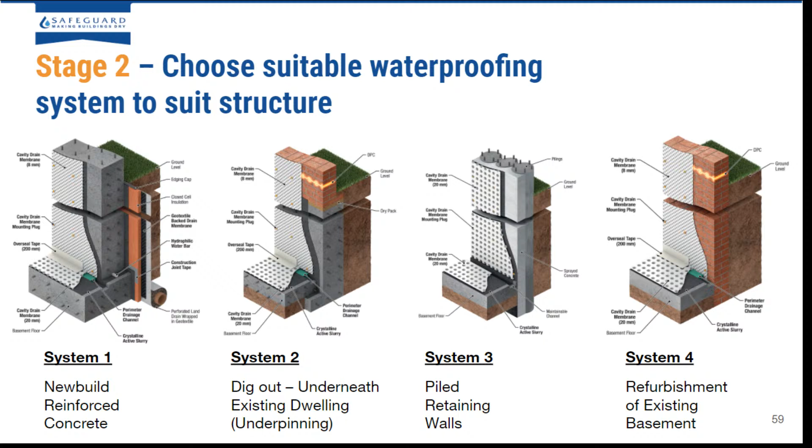When we get to stage 2, this is about choosing the relevant waterproofing system or combination of systems appropriate to the type of structure you have. A waterproofing design specialist should always be included as part of the design team, as stipulated in BS 8102, and as stated in the NHBC chapter 5.4, waterproofing systems should be designed by a waterproofing specialist. This is where the line of inquiry can split between using a design consultant or a specialist contractor to design and install as well.

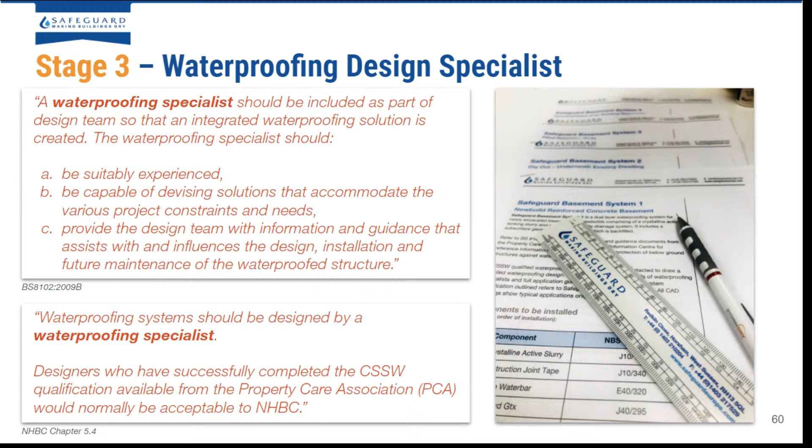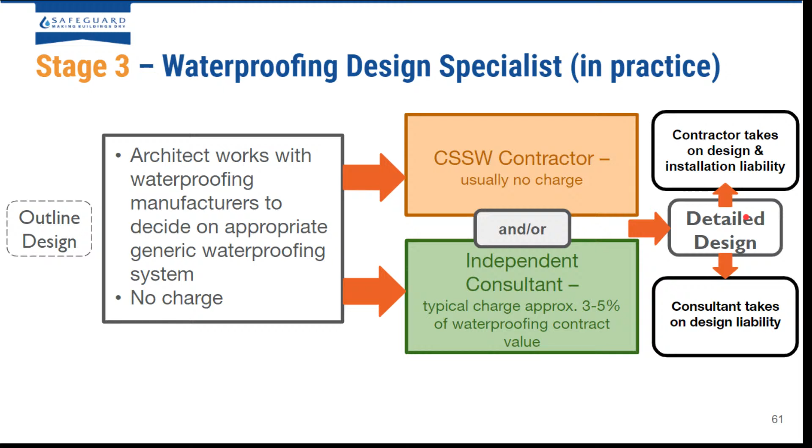Without necessarily a charge, assuming it's then taken on to the installation process as well. An independent consultant will offer a percentage fee of the waterproofing contract value and offer the design only. That's where, for example, with the independent consultant, there might be an obligation for any installing contractors to carry out product training to make sure they're familiar with the products they're installing. Or in the case of going to a specialist contractor, they would offer the design and carry out the installation themselves.

And that's where the guarantees split up between design, or design and installation - this is stage 4, using a specialist contractor. The good thing about using a specialist contractor is they could understand the correct sequencing of works. A lot of them will be able to carry out risk assessments for their own guys on site. They'll be able to provide COSHH assessments for relevant products.

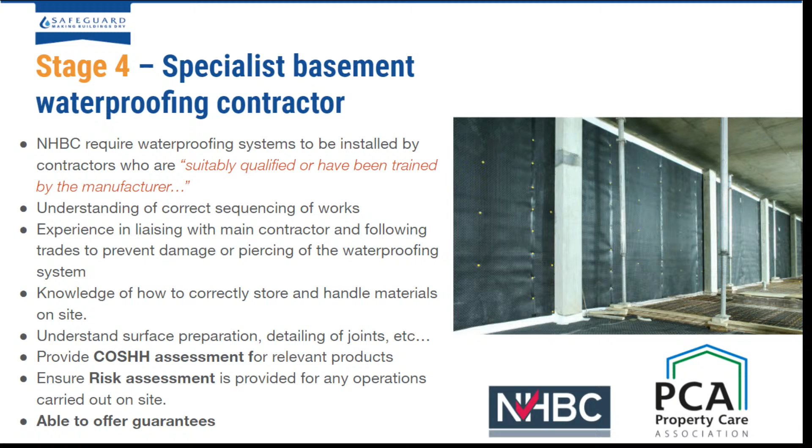They will be able to liaise with the main contractor and following trades so they can work with other trades prior and following, to make sure work that needs to be carried out in sequence is done in the right order, with an understanding of surface preparation, detailing of joints, etc. Ultimately they'll be able to flex on site as well, so if changes in conditions occur, they'll be able to manage that.

Finally we get to stage 5, handover and maintenance. The advice here is quite good, and many people these days tend to be much more conscious of the work they're carrying out, and like to log the application of the work and keep a record of what they carry out. This is particularly important with structural waterproofing systems, where you need to maintain a working system but also prove it's been installed correctly throughout the process.

There's a checklist we can advise people on, with regards to things like flood testing the level of the slab, making sure water is running in the right direction, checking the condition of the substrate it's been applied to, making sure any electrical work has been carried out by a qualified installer, and making sure the system is even tested on the floor before floor membranes go down and wall finishes are included - making sure the process runs systematically, ensuring it's fully functioning.

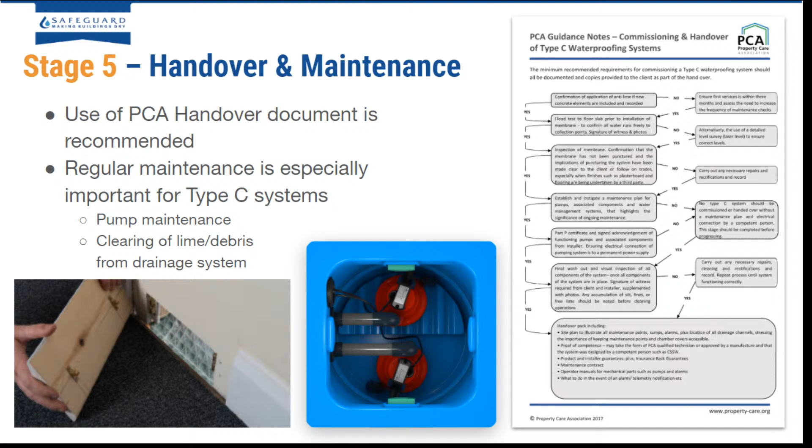At the end of it, advice is handed over to any user regarding, for example, activation of the alarm, any subsequent works which might need to be carried out, and how things could be installed without damaging the waterproofing system that's been applied. And finally, a nod to basement ventilation.

As mentioned before, back in environmental grade 3, ventilated residential and commercial use areas, including offices and restaurants, ventilation, dehumidification, and air conditioning are necessary, appropriate to the intended use. So this is where we get to grade 3.

Often in a basement refurbishment, it might be a case of just putting a fan in a corner, and that will deal with a single space without too much problem.

On larger projects, depending on the use, if we consider a small workshop versus, for example, the kitchen of a restaurant above being down in the basement, there might be a requirement for a more substantial ventilation system to be installed, which is where someone like an HVAC contractor can be called in to specify a specific bespoke system for the intended use.

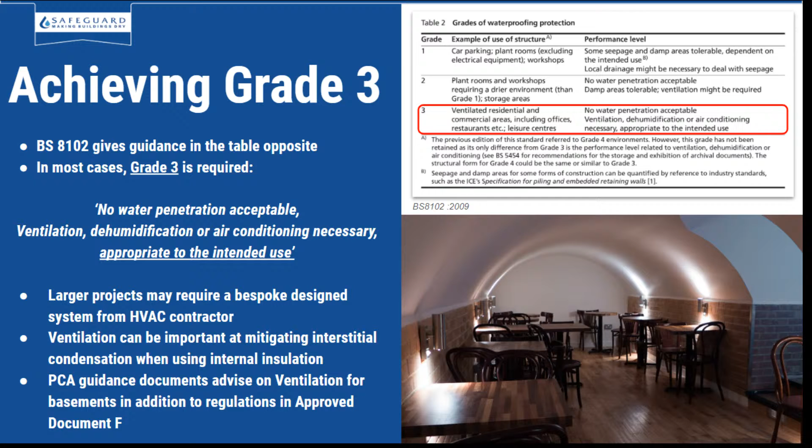We should also know the PCA guidance documents advise on ventilation for basements in relation to things like Approved Document F, regarding ventilation in buildings. So there's a lot of documented guidance out there for advice on achieving the right conditions below ground.

As with a lot of construction-related subjects, there is a clear want, need, and will to minimise environmental impact as well.

The Royal Borough of Kensington and Chelsea carried out a study showing that the embodied carbon in materials used for basement extensions is considerably higher than above-ground extensions. So there are some unavoidable conditions that can happen when building below ground.

There are ways to try and mitigate that as much as possible. For example, a 20% reduction potentially in carbon could be achieved by using recycled coarse aggregate in concrete.

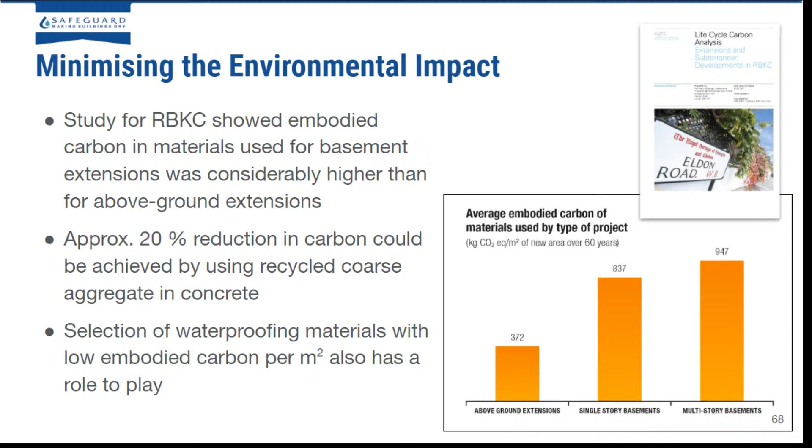Also, your choice of waterproofing materials could affect your environmental impact, for example by reducing the plastic used in some of these studded membranes.

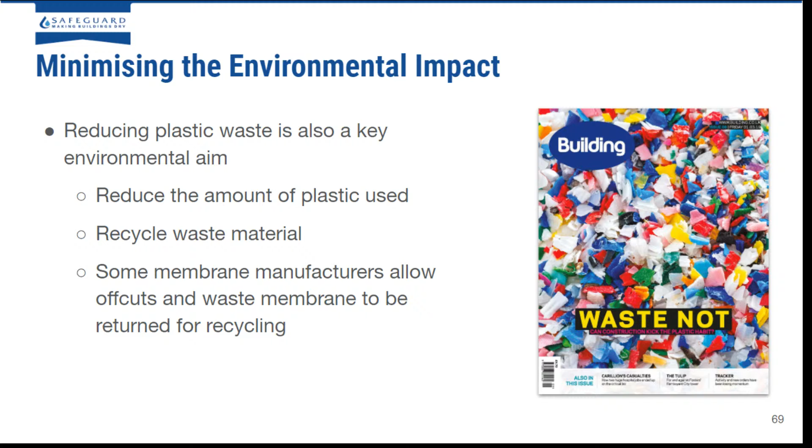Some material suppliers offer recycling, returning remnants and offcuts for them to recycle. Some manufacturers offer that as an option as well.

Some other systems - these particular membranes have been designed for some time now with what's called multi-layer technology, which is two virgin layers of polypropylene with recycled content in the centre.

As a step further, they've tried to take up plastic that has been harvested from the oceans, used in fishing situations like nets, and repurpose these plastics as part of a recycled element of the drainage layer.

This helps minimise embodied carbon, and the manufacturers we use are based in Norway, which has a lot of hydroelectric power. They're one of the cleaner nations in the world in terms of recycling and green credentials, and have been producing multi-layer technology membranes for some time now.

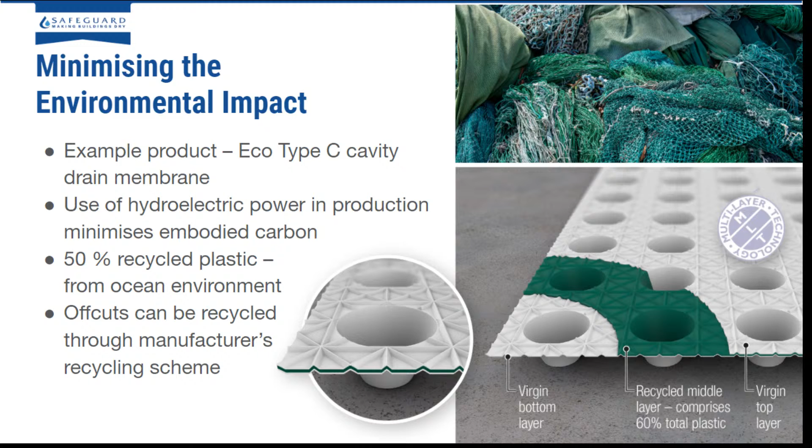So in summary, as a review: a simple design, reinforced structure with minimal service entries and construction joints, and use of combination systems to reduce risk of failure.

Use accredited waterproofing materials where possible, so BBA certificates and CE certificates on all products, and engage with a basement design specialist, whether independent or part of a specialist contractor firm, to install the waterproofing system properly.

Finally, ensure that the handover documents and ongoing maintenance schedule are in position so that you can secure the insurance-backed guarantee, which normally runs for a period of about 10 years from your specialist contractor.